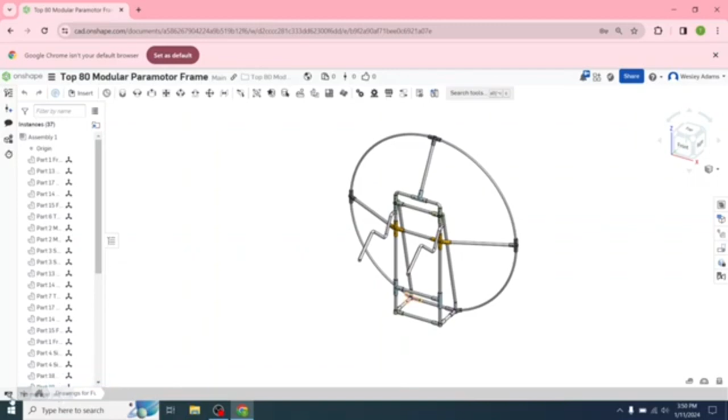Full scale frame, let's open that up. Now we've got that folder open. Let's left click on the plus sign, let's go create a drawing. You can create the drawings from different views, but let's do this one at a time. It gives you way more control on the different angles that you want instead of allowing the computer to pick those for you. Okay, left click, okay.

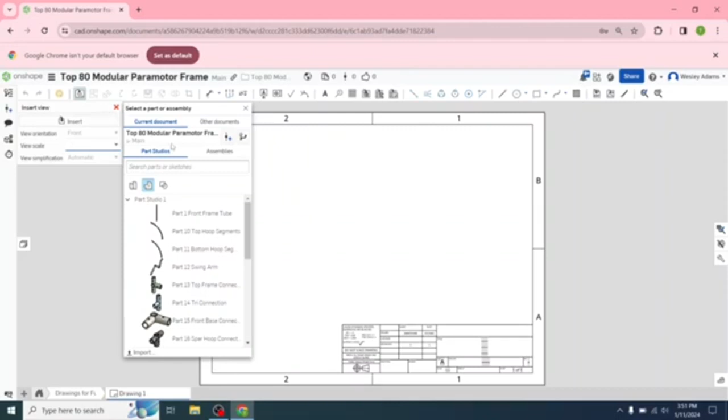It'll automatically pop up the insert view, but I'm going to show you where that's at. I'm going to close that out for just a sec. Let's go over to Insert View, left click, and we're going to start with Part 1. So we'll go Insert.

It's asking the scale, so left click here. We're going to go 1/5. Bring that down some, let's check and see. So let's go Insert, let's go Part 1, and let's see how large that is at 1/5 scale.

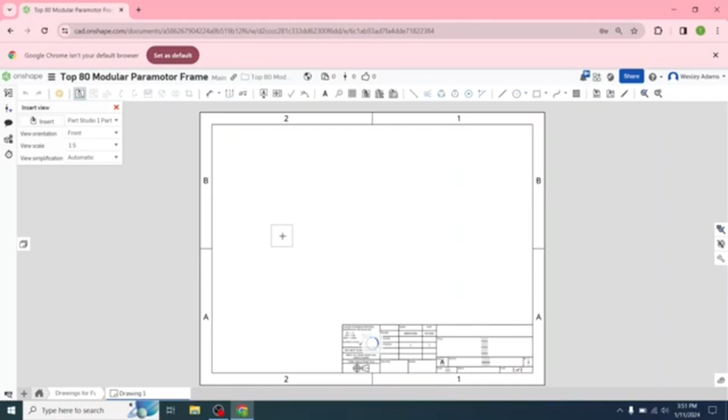Yeah, that's pretty large. Now this is 36 inches, I think it's going to be our longest part. There we go. I think that's really all we need.

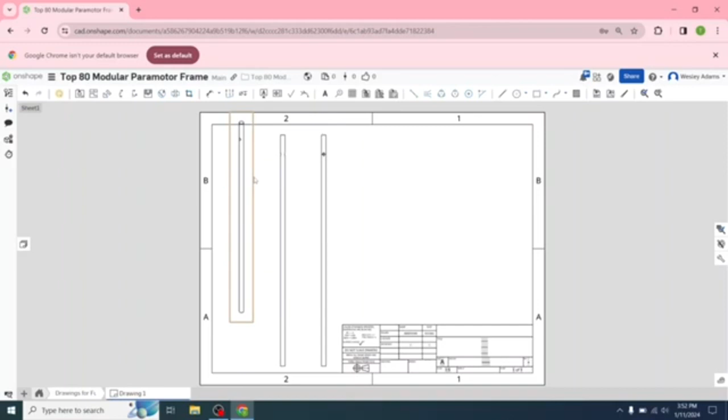So I'll explain these views. I'm going to left click again, and then I'm going to hit Escape in place. I'm going to bring this one down. I'm going to see if this isometric view will move over here. Yeah, that's perfect, so we'll leave it there.

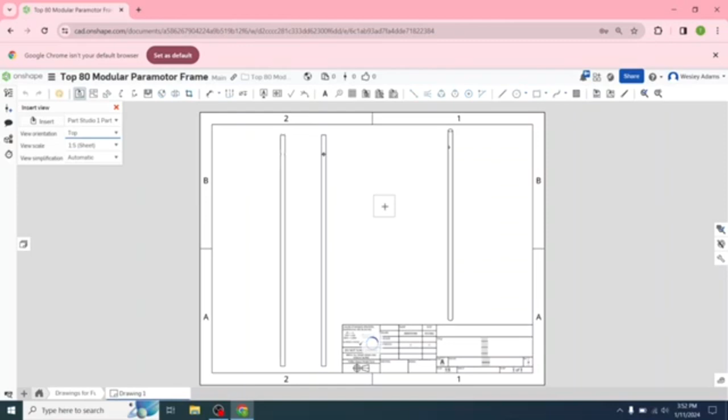We really don't need a top view. I mean, we could add it, let's go and I'll show you how. So let's go Insert, let's change our view orientation to top. And let's place it here since we have an open space. We're going to need these other spaces for the longer tubes that you see. So this is just a top view.

There's going to be a lot of repeated tools that we use, and you only really need to see it once. Left click the dimension tool, but before we open it up and use it, let's look at some of the options. So this is just your normal dimension like we used in Part Studio. We're going to use a 2-point linear dimension, point-to-line dimension, line-to-line, 3-point angular dimension, line-to-line angular dimension, radial dimension, and diameter.

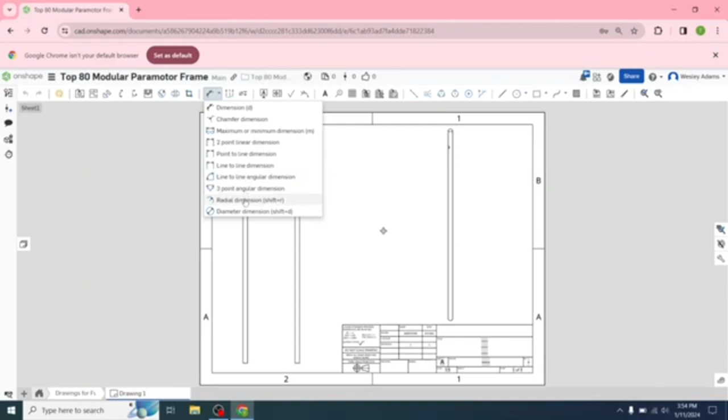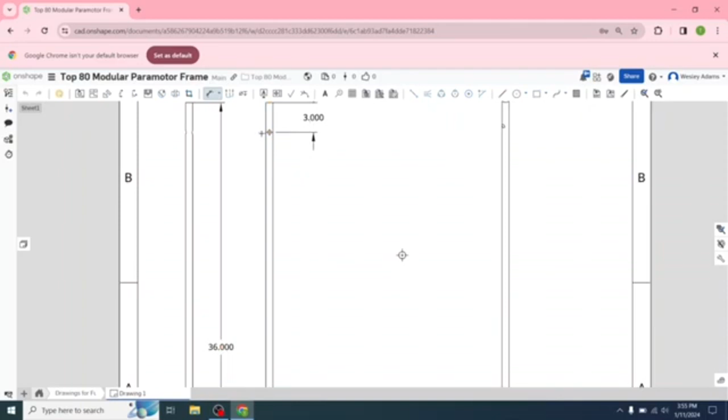Left click on dimension. I'm going to left click on that point, I'm going to left click down here on this point, and that should be 36 inches. Now let's scroll in, let's left click on that point, left click on this line, and draw that out. That tells us that bolt hole is 3 inches from the edge.

There's radial dimension and diameter, let's do that as well. So there's the actual diameter. Remember, we made these 0.73, they're actually going to be 0.75. They'll be 3/4 inch tubing.

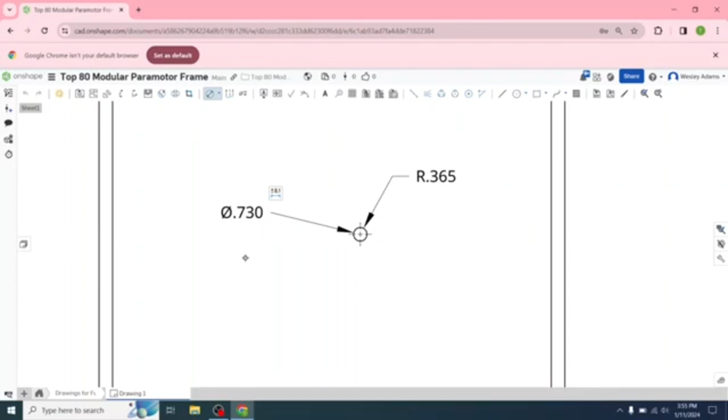Now there's another way that you can look at the diameter. So let's go back to our dimension tool. We're going to click on this line, we're going to click on that line, and that tells us the diameter as well. And then we can title it front frame tube.

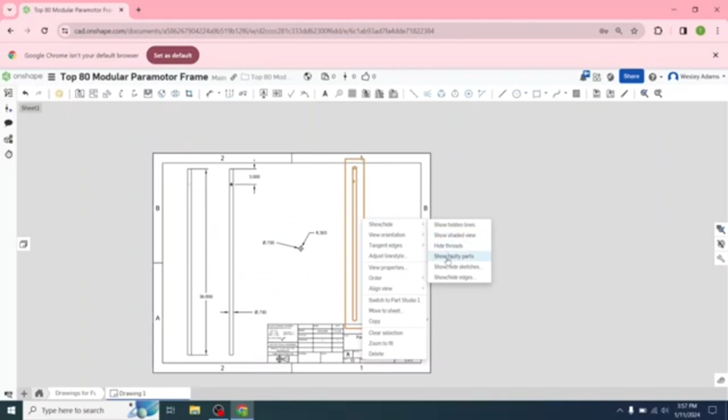Can right click on that, and then I could change that orientation. As long as you put these in one at a time, I'll show you what I'm talking about. So if I went to bottom view here, notice how it changed the others because we put these in all at one time. Now if I would have stopped, messed with the part, and then added another part after that, that would not have happened. So I just clicked undo to get it back to normal.

So what I mean by that is if I insert another part, let's say it is from bottom view, and I click over here, hit enter, and then I right click and I go view orientation and I change that to left. Notice this time it didn't change any of those other parts. I don't need that one, so I'm going to left click to highlight it and delete it.

If you just put these in one after another, or you allow the program to select your parts, you'll run into that issue where you can't change the orientation, because it kind of chose those for you. Unless you add it, stop, make adjustments, and then add another part like I just did, it will change the orientation of the rest of it.

So I'm going to right click down here and rename that. This is going to be part 1, front frame tube. And that's going to be within this drawings tab.

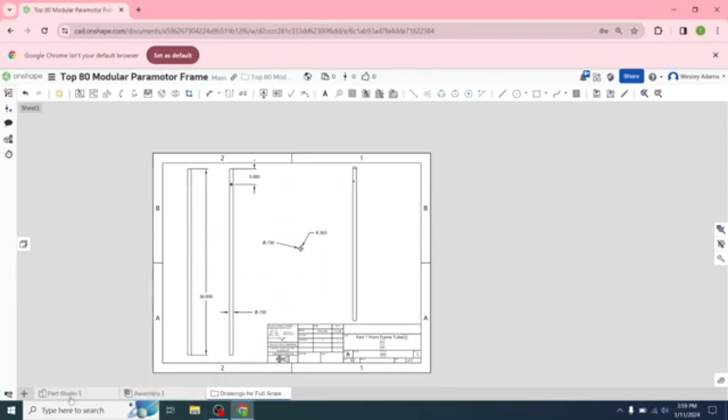I'm going to go back to the home so you can see. You notice the one I just created doesn't show up down here, it's because it's in this folder. When I use another tool, I'll show you those steps.

I'm going to use the angular dimension, so line to line angular dimension. Left click on that. Alright, I'm going to hit escape.

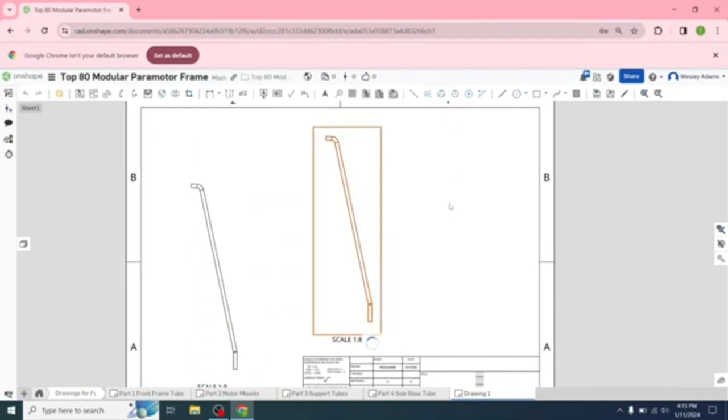I'm going to change this view to isometric, and then we're going to move this over, and get our angles on this. So we're going to go up here, angular dimension, click on this line, click on that one. That gives us our angle for the top part of that tube.

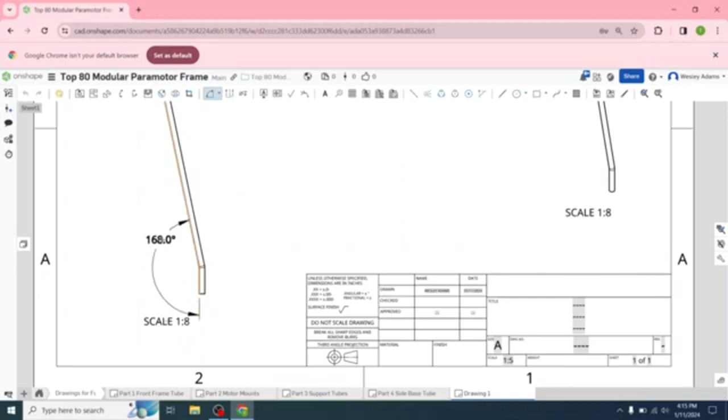Let's do the same thing here, we'll get our angle here. Right there, that looks good.

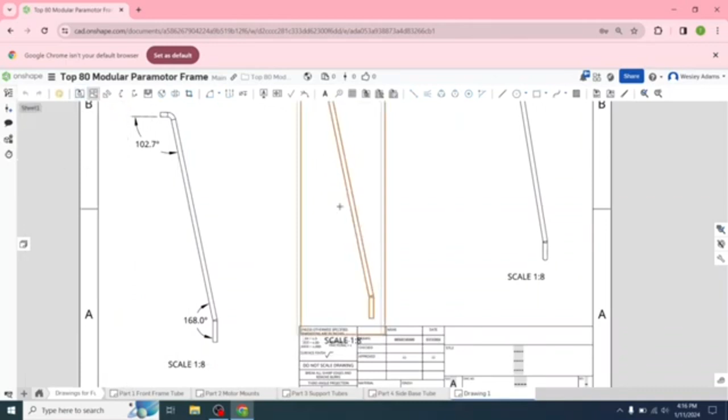Let's change our scale again because it's automatically trying to go to 1/5. Let's go to 1/8, bring this over, and insert it, and then we'll change the orientation. We'll just keep this same view.

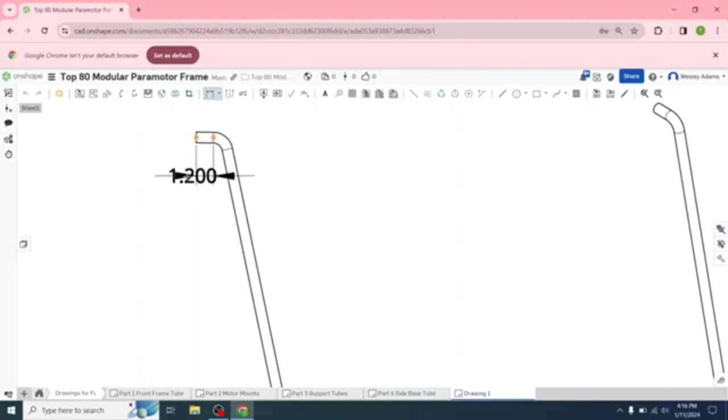Now let's go up here and do point to point, we haven't done that yet. Point to line, let's go to 2 linear points. That's useful with bolt holes, but we can use it here as well. So we'll get the distance from that part to there, from this part to here.

Let's go from here to where that bend starts, from this line to here.

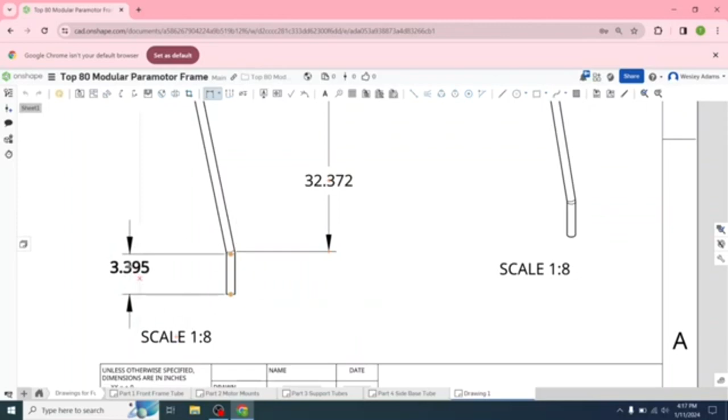Let's go back to our normal dimension. We'll just click on this one, click on that, just showing the diameter of the tube. We're going to do 1/8 scale.

We're going to insert the top hoop segment. It's going to be fairly large, but we really only need one of these because we can get most of our measurements off just this one. I'm going to hit escape.

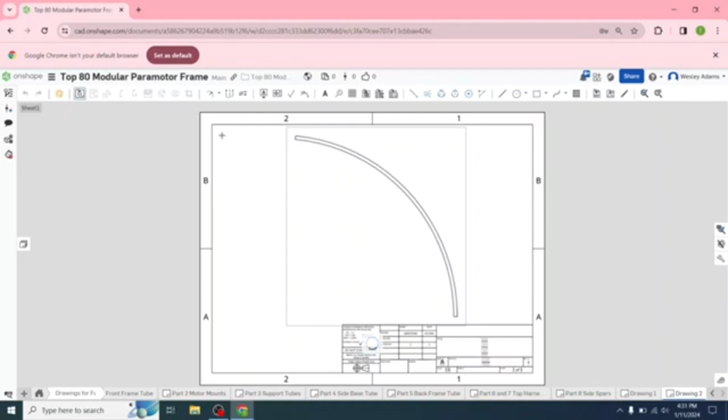Then I'm going to go up here and go to radial dimension. Here we're going to select this inner line, that's the radial dimension from that point. Remember it was 28. And if we go to the outside of it, that's with that 3/4 inch, or actually a 1/2 inch tube, so right in the center of that would be 28 inches.

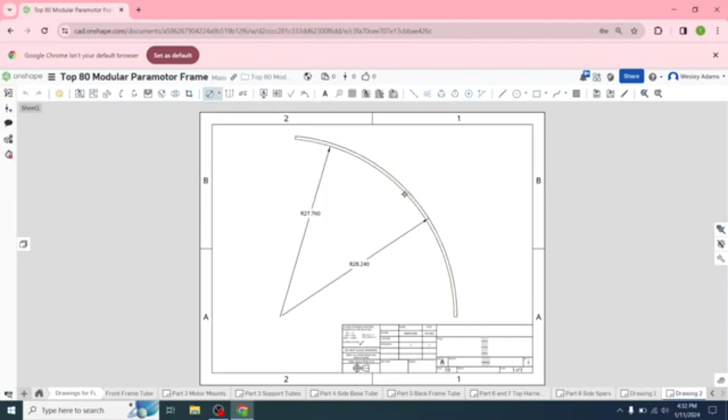Come up and do the diameter, right? And it's telling us this will be 55 inches in diameter.

So I'm going to select this outer line, you notice a little bit more, mainly because we have that 1/2 inch difference from inner to the outer portion. You can add here, that might be useful, is just the diameter of that tube, showing that it's 0.48, it's actually going to be a 1/2 inch in diameter.

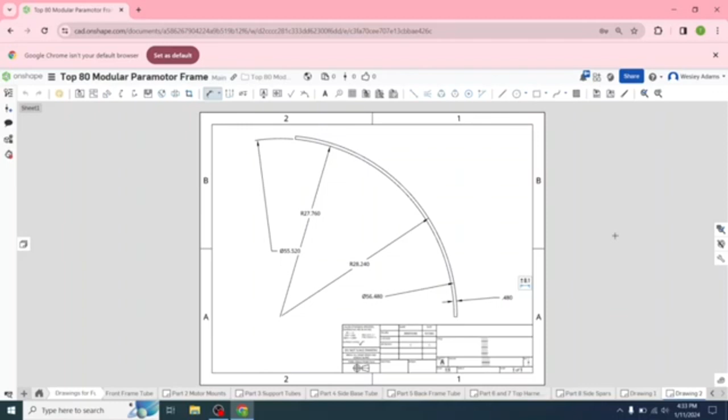We did that so the 3D model could fit together. This is our swing arm. This is where the radius of the bend and the angles are going to be really useful.

So I'm going to scroll in here, go up here and select, let's stick with what we got, radial dimension. We'll click on that, it kind of gives us an idea of the radius of the bend there. We'll do that for each one of the bends.

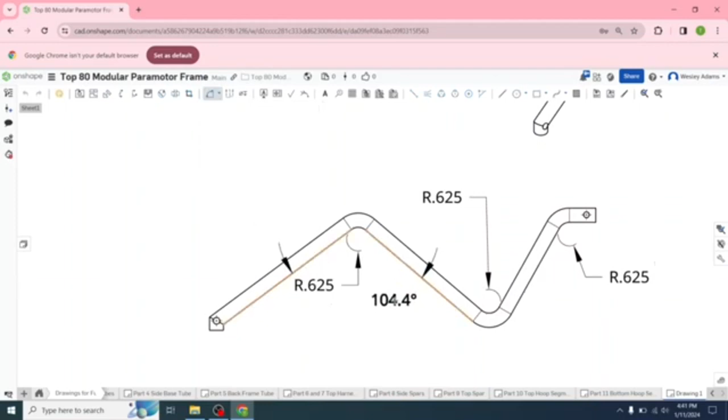Now let's go to angular, let's go line to line angular dimension to get the angles of these, see what we're looking at here. That'll make it easier for us to replicate these parts.

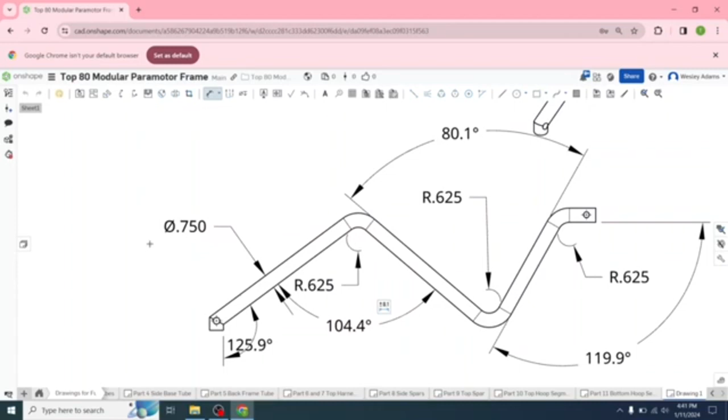There, that's the one I want right there. I'm going to bring that down. And then if we wanted to see what the diameter of the tube was, we could just click on these two here, that would tell us the diameter of the tube. Let's use some of these other points.

Let's go 2-point linear dimension, click here to there. Tells us the distance we had that bolt hole from the edge. Right there, that one was 1/2 inch. And I think that's good enough.

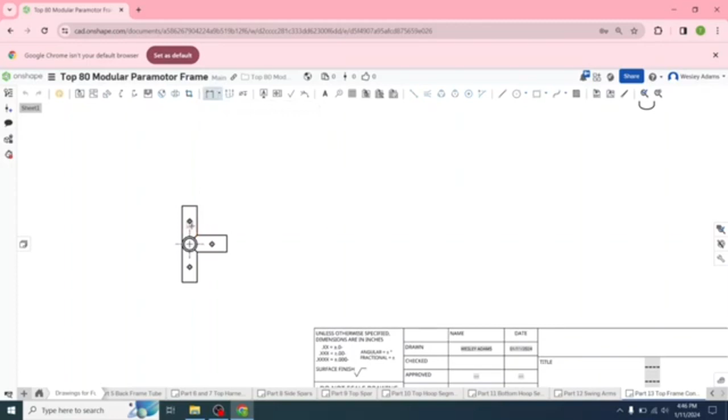Let's go in and do 2-point linear dimension. Let's click on that, to that point there, and that's 1 inch.

We'll do all of these bolt holes first using this tool. We'll do the same thing there.

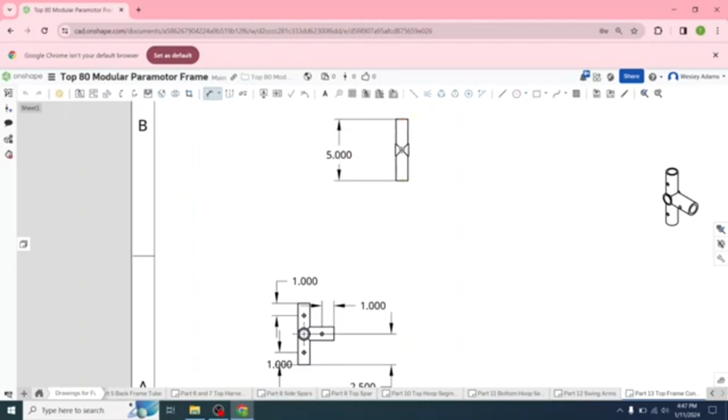Good, dimension, just the dimension tool. Let's click here and here. There we go, and we'll get the halfway point so we can kind of see where that center point circle was. And we can get the diameter by coming up here and clicking these two lines, if I can hover over it. There we go, 1 inch in diameter.

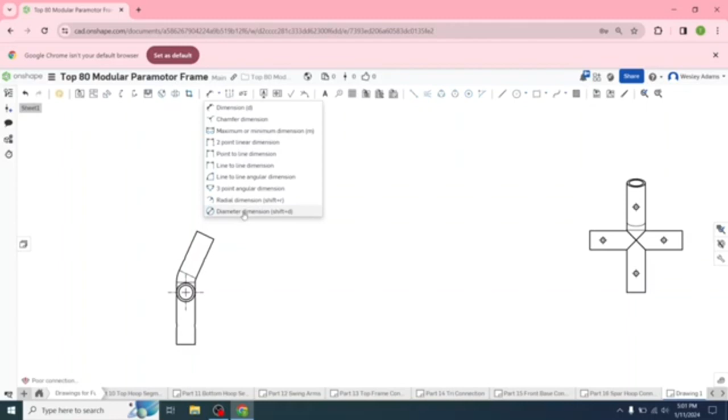Sections that has an angle to it, so we're going to go ahead and click here and here. We'll get our angle, move that out, come over. We can look at the dimension tool for the inner diameter, and we'll go in here, select that one. Really just that angle we needed, and then we can come up.

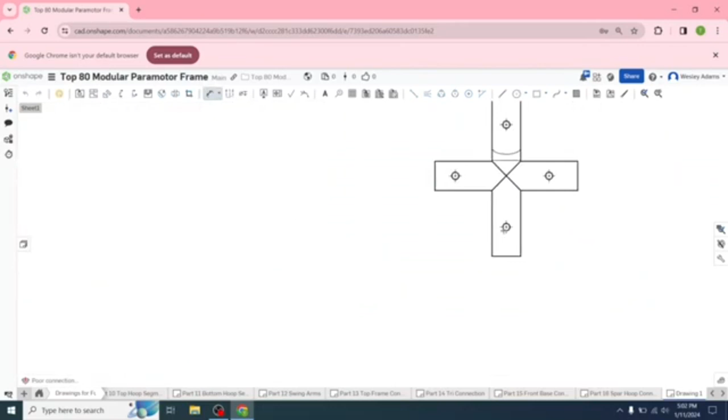We can use just the regular dimension tool or the point to point. We'll get the distance for these holes that we're going to use like drill guides. That's the distance here between this tube and that. So that was 5 inches.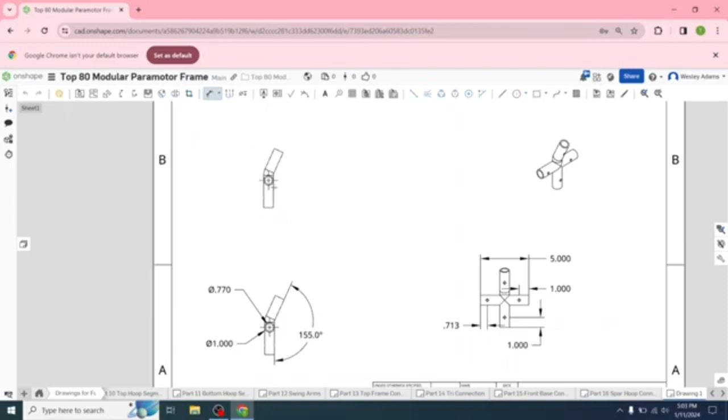Insert front view, hit escape, and let's put those dimensions here so that we don't have too many on one drawing, because it gets really messy when that happens.

Alright, that should be good enough to do point to point. So let's go up here and go 2-point linear dimensions. There's our point there, there's the other point.

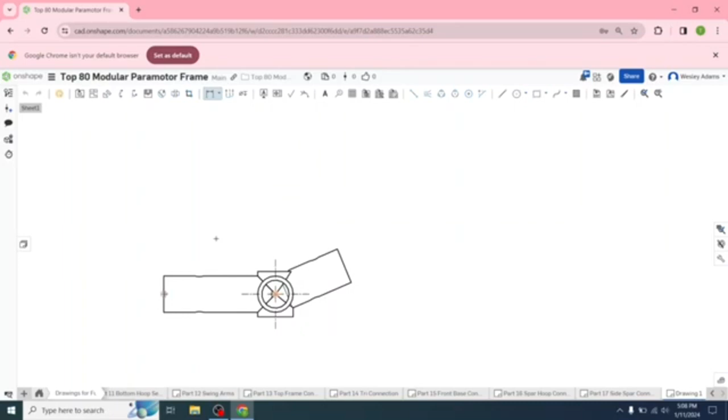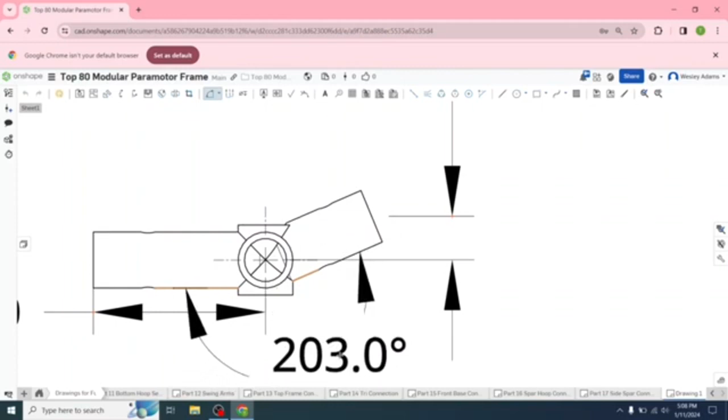So that's when it becomes useful, when you have problems finding an area to select using the regular dimension here. We're going to go line to line angular dimension, but we want to select this one to this one. There we go, and that gives us our angle. Or we could come across to the other side and go here. I think that's the one we originally used.

Let's hit escape. I'm going to delete this one because I think this is our best angle. That's what we used when we first created it.

We're not going to print it, but we might want to know what the diameter, what the radius is, especially if we were going to go back and change anything. We just wanted a quick reference. Let's go ahead and put it in.

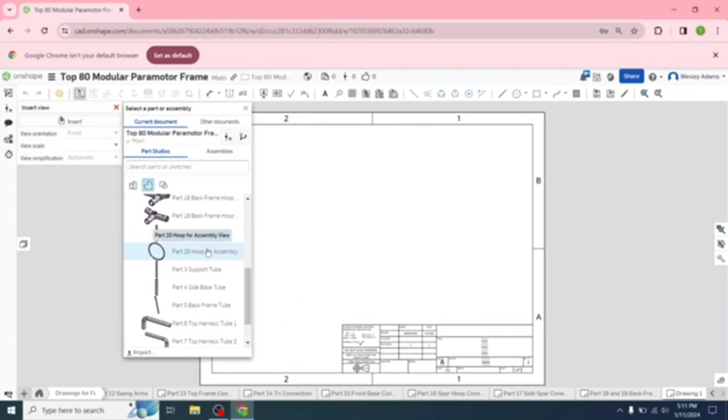So we're going to go part 20. We can't go 1-to-1, we're going to bring this down pretty small because it is large. Let's go 1/10 its original size. That looks like that'll fit in there.

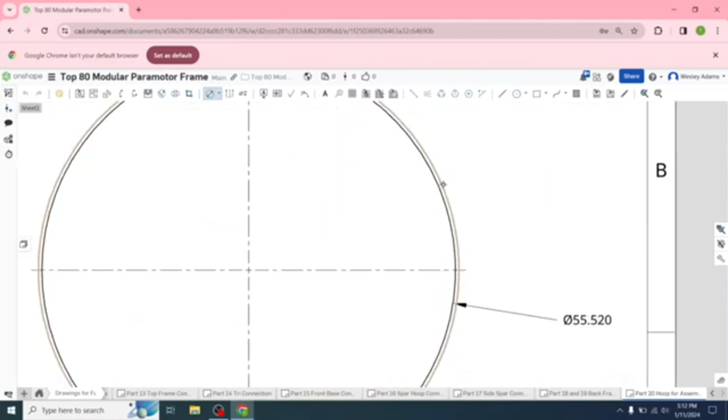Let's hit escape, so let's go up here and let's go diameter. So our inner diameter, 55 of the hoop. This will do the outer diameter, 56. And so this is a 0.48 inch hoop as we drew it, but it's really going to be a 1/2 inch. So we're looking at 56 inches.

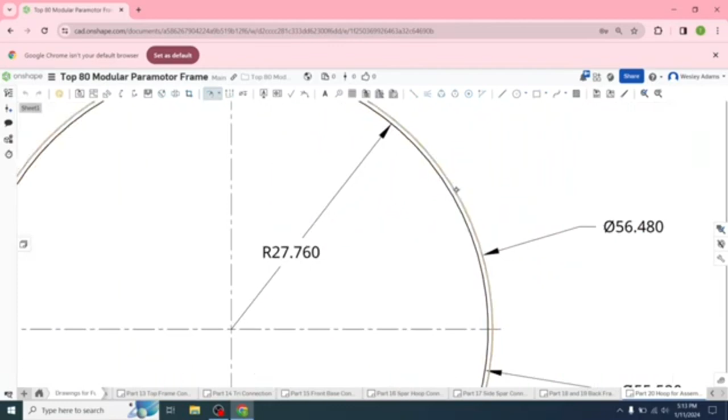If we wanted radius from the inner part, there's our radius to that portion. If we go to the outer part of the hoop, there it is there. We'll just leave those next to each other. And then if we wanted to get the dimension of the tube, like what did we create it in, it's really going to be a 1/2 inch, but at least that gives us the dimension there. And that's it.

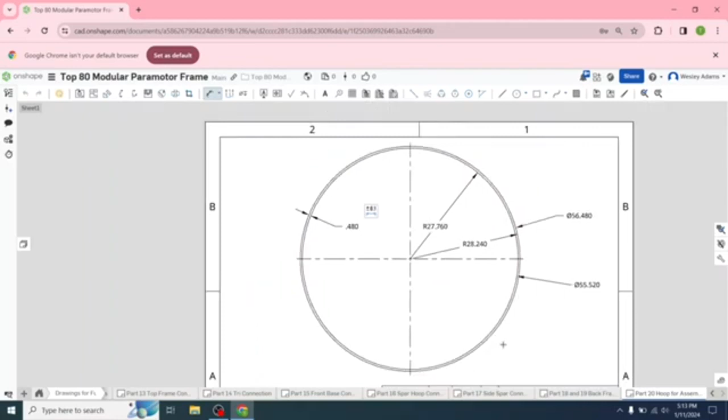So those are all of our parts. They're all going to be right here when we get ready to print.

The only thing I would add to this that we haven't covered is when we get ready to print these off, you'll right click, hit export, and then PDF, and then it'll export it as a PDF.

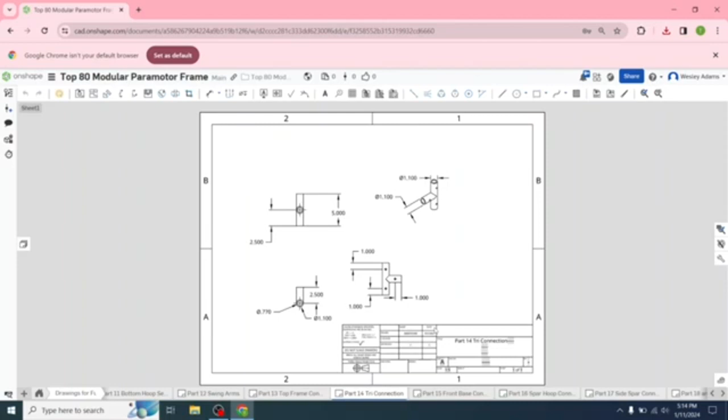You can do that for all of these, and then print them off, put them in a folder, so when you're working on your parts, if you need some sort of dimensions, get a rough idea of what it is in the computer, but you don't want to have to go back to the computer, especially if you're working out in the shop. You can use this as a quick reference, and you can also write on it. So if you need to go back and change the original settings, you can write in what you think it should be and then use these.